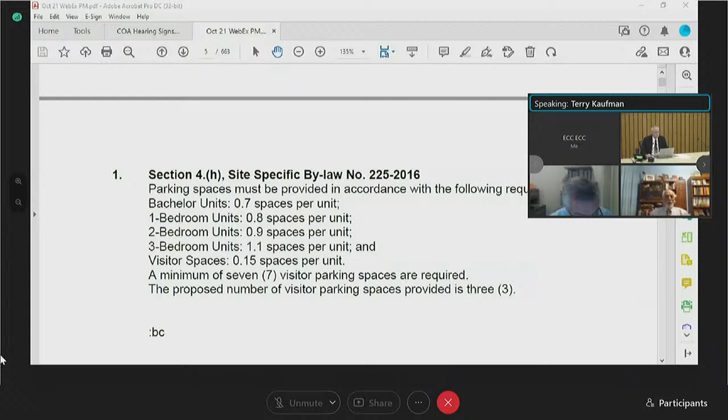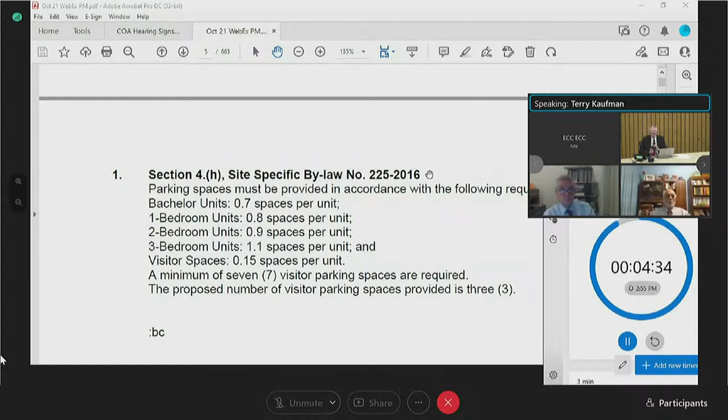This proposal is supported by our parking study, transportation engineer, and the city's transportation department. Both of these documents are in support of our application and are on file with the committee. I am presently with the architect of record, Gordon Pape, and if there's any questions you may have as a result of the site plan and the applications, Mr. Pape is available to speak.

Okay, thank you, sir. Does the committee have any questions of the speaker? There being none, I'll go to the next person on the list.

I have Adele Blau, B-L-A-U. Are you there, madam? Good afternoon, I am here. Can I get your full name and address, please? Sure, my name is Adele Blau.

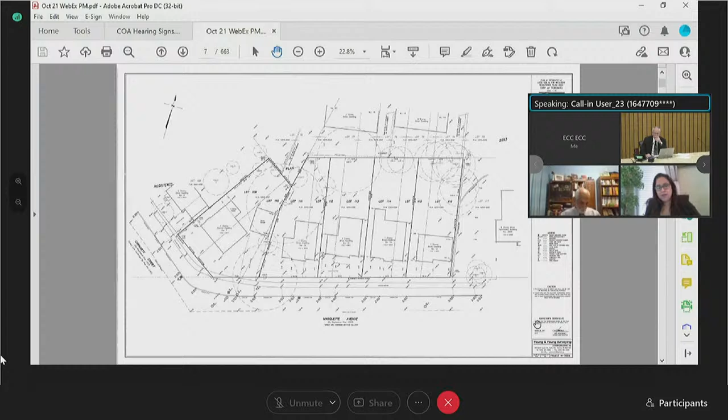I believe that the planning committee, when changing the zoning several years ago, when this was first proposed, did a major change in terms of not minor variances, but the actual plan and the zoning. So I think that they actually need to give respect to their views on it in the first place, and why the parking was allotted in the way it was.

So Marquette is abutting Stadacona Drive, and the parking garage is situated on the back of triplexes, which have a backyard. There are many children on the street, and there are many children in the neighborhood.

There were 11 townhouses put up on Stadacona Drive that have an extra 11 parking spaces provided by the city, and that is actually not enough for this neighborhood.

Both Stadacona, Carhart, and Marquette are cul-de-sacs, and they only have one outlet. The traffic is very, very troublesome as it stands, and I think that bringing vehicular traffic to the street in terms of visitors is not enough.

By the way, the 11 townhouses each have their own parking spot, but that's not enough. Usually the majority own a second car and end up parking on the street. So when visitors come, the overflow is in illegal parking spots. So that's the first piece.

The second piece I wanted to bring to the committee's attention is that there was another minor variance that turned out to be not so minor, with respect to changing the property line, which resulted in property owners digging into the properties on Stadacona. So in terms of this being a minor variance, I want to bring to attention that other things might happen down the line, and removing visitor parking from the site can bring problems.

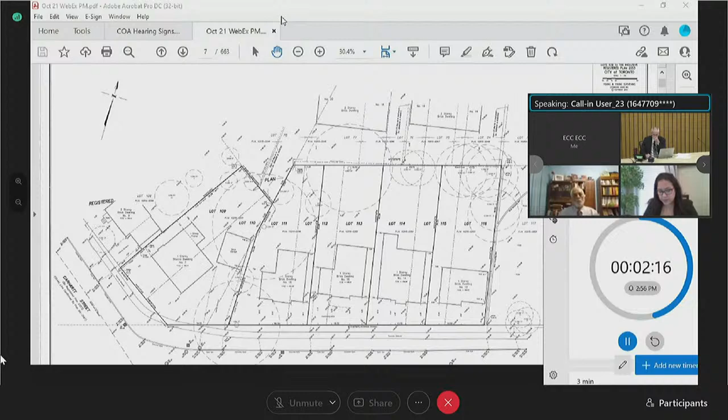Thank you, Madam. Does the committee have any questions of the speaker? Being none, I'll go back to the agent, Mr. Kaufman.

Mr. Kaufman, are you there? Nothing else to say, thank you, Mr. Chairman. I don't think I have anything else to say. We've done our best to cooperate with the neighborhood, and I think we are continuing to do so.

I know that this site is currently under construction, correct? That is correct.

Does the committee have any questions of the speaker? Mr. Khan? Thank you, Mr. Chair. Mr. Kaufman, did you have any meeting with the neighborhood people? I had many meetings with the neighborhood people, not this one, not today, but before we started we had many, many meetings. I presented everything to everybody and kept in touch with the neighborhood all the way through.

Does the committee have any further questions of the speaker? There being none, could I get a motion on this application, please?

Ms. Sankar? Yes, through you, Mr. Chair. Looking at this application, I was worried about the transportation report, some of the parking study, and some general concerns I had heard from the deputants today. But now that they've worked out that plan with the city, I feel that this application does meet the four tests. So I'll put forward a motion to approve this application as is.

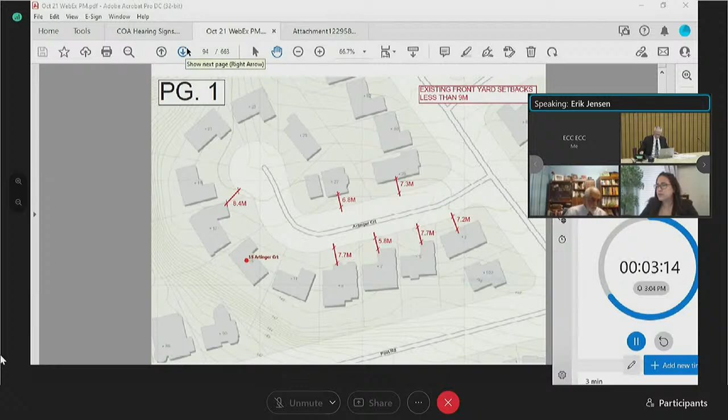Page 2 shows the existing house dotted with the proposed in blue. We worked very closely with the TRCA, who indicated that the back of the house would need to align with the existing, which is what we've done. There's a 6-meter setback for any decks or stairs from the top of bank, which we've also done. You can see the characteristic linear forest that sweeps along the back of the property.

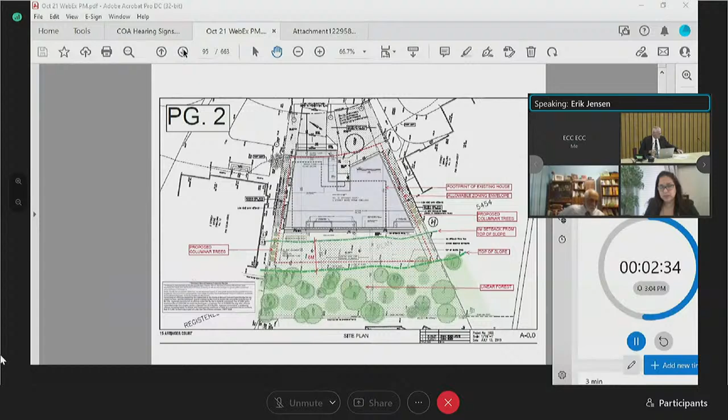Going to page number 3, you'll see the articulation of the front of the house in terms of breaking down the massing, and the keeping of the existing front yard tree, which I think has been important to the neighborhood.

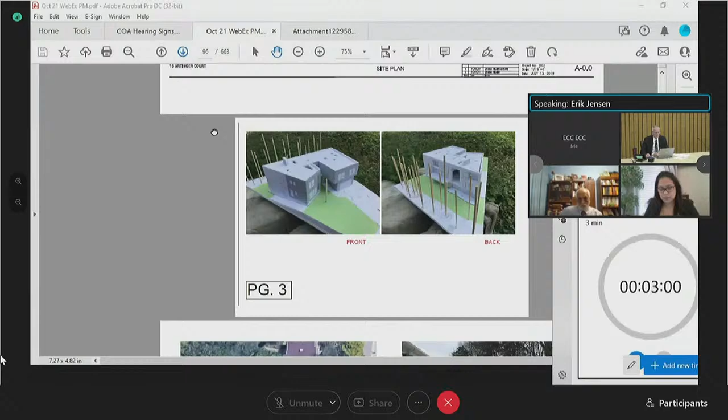Page 4 shows the linear forest at the back of the properties along Arlinger Court, and you can see the ravine both in the winter and summer at the back of the property—quite a dense kind of wall of green, if you like.

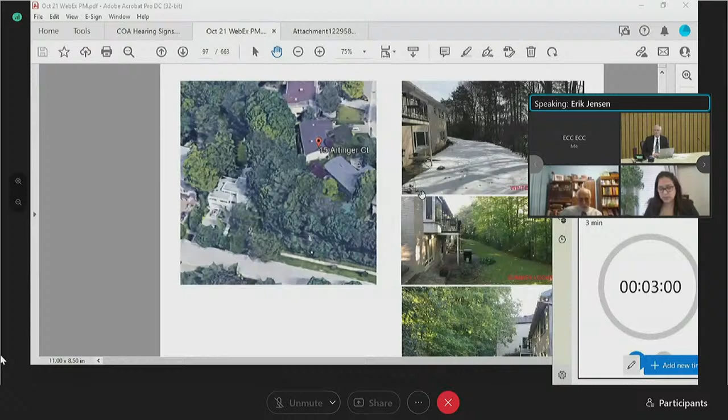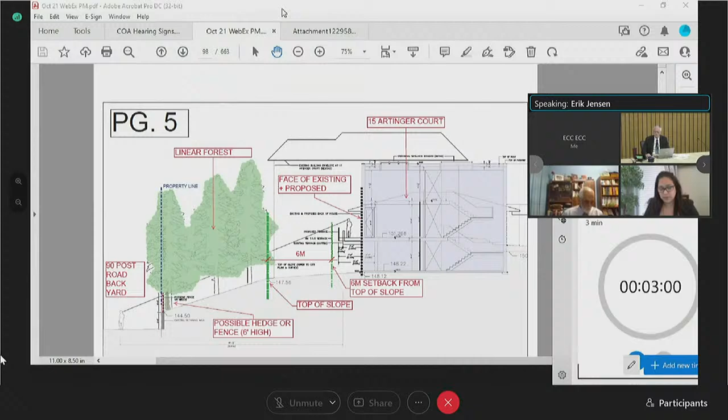As mentioned previously, we are fine with changing variance number 1 as prescribed by planning. Variance number 2 regards the TRCA and their mandate over the stable top of bank. From the very conception of the project, we've reached out to the TRCA and followed their guidelines judiciously as we designed the project. They provided a report indicating they have no objections to the proposed works.

In conclusion, we believe that the proposal meets the 4 tests of approval. Thank you, thank you very much.

Does the committee have any questions of the speaker? There being none, I'll go to the next person on the list.

I have a Mary Beth or John Williamson. Are you there? I am, yes. Can I get your full name and address, please? John Williamson, 11 Artinger Court. We're the immediate neighbors of 15 Artinger Court.

Thank you for giving me the chance to speak, Mr. Chairman and the committee. If you'd like to give us your thoughts on the application, sure—I'll start by highlighting to the committee that the architect and homeowner have engaged us in a positive and proactive basis as they move their project forward.

They've been open and understanding about our concerns. They've offered reasonable solutions and set a framework and foundation of being good neighbors as we move forward. Our backyard is our most cherished asset, so we've extensively reviewed and scrutinized the proposed new house and their build. The homeowner and architect have met with us several times. They've listened to our ideas and have been open and accommodating to what we'd like to see happen. They worked hard to maintain the integrity of the natural elements of the property.

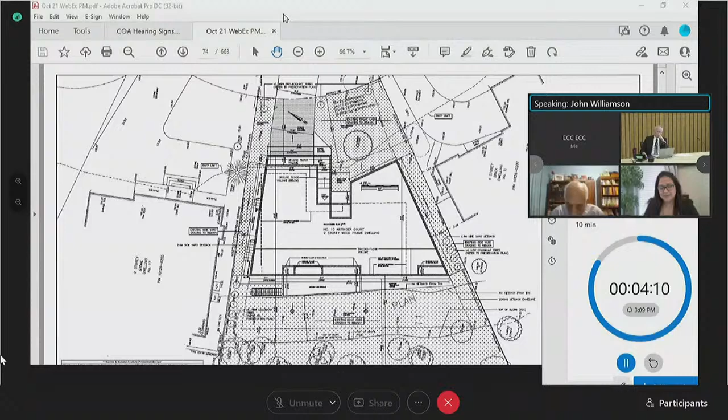I understood that there may be some issues with 90 Post Road. Having been a resident on the street since 1994, I will tell you that when the foliage is in, and even in the winter, those trees and canopy are very robust. There are over 200 trees on our property alone, making it virtually impossible to see down to Post Road or that house or dwelling.

And so I would say that we are very supportive of the variations that have been proposed, and we're supportive of the architect and the homeowner as they move forward. They've done a great job working with us. I'll also point out that our street is filled with construction and teardowns. These are the first homeowner and architect to come and fully engage us and listen to our ideas, and I applaud them for doing so and being so cooperative.

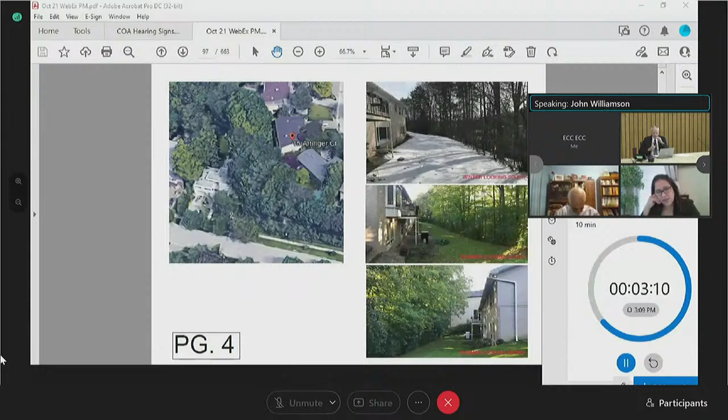Okay, thank you, sir. Does the committee have any questions of the speaker? Being none, I'll go back to Mr. Jensen. You heard the comments from Mr. Williamson. Did you have any additional comments? No, I believe not. No.

Okay, thank you. Can I get a motion on this application, please? Mr. Hunt? Thank you, Mr. Chair. I've listened to the applicant and his agreement to modify the front yard setback from 6.75 meters to 7.5 meters and the second story overhang to 8.2 meters.

And that the condition that the front yard be developed substantially in accordance with the site plan attached to the planning staff report. And also urban forestry, I am happy to recommend approval of this application.

Thank you, Mr. Hunt. Someone to second Mr. Hunt's motion? Ms. Sankar seconds. All those in favor? Opposed? Mr. Khan dissenting. Sir, your application's been approved, subject to urban forestry and city planning conditions.

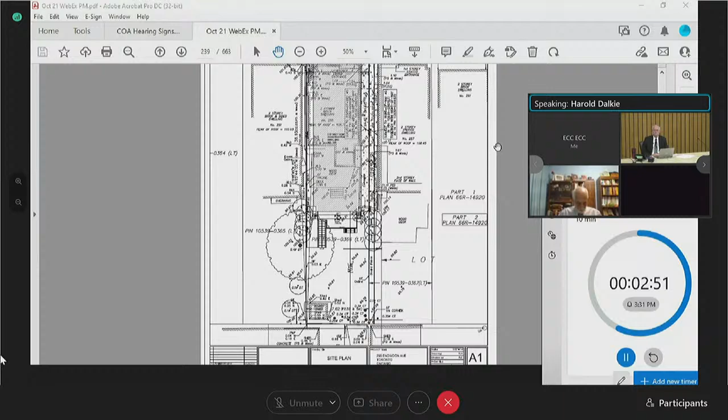That's it, thank you. Okay, thank you, sir. I just wanted to ask, did you get a chance to read the staff report from city planning on this application? Yes, I did, sir. Did you notice their comment about the main sidewall height? Yes, I did, but I couldn't find on the actual drawing, especially in the rear yard, how high the wall is relative to 251's building. Okay, thank you.

Does the committee have any questions of the speaker? There being none, we'll go to the next person on the list. I have a David Stewart. Are you there?

Just something that arose when Jeff was mentioning south of Broadway - that's the city of Toronto. I'm sorry, what was that? Jeff mentioned comparables south of Broadway. South of Broadway is the city of Toronto. I think what she's referring to is City of Toronto versus former City of North York, or East York.

Are you making that with respect to a particular variance? Because variance number 5. No, I'm not. Okay, what are you referring to with respect to North York and City of Toronto? Mr. Seda had mentioned comparables south of Broadway. But south of Broadway is the city of Toronto, so the city of Toronto has different rules. I'll ask him to clarify, because sometimes the former boundary of North York skirts around quite a bit, so it's hard to figure out where it is, or where it was, pardon me, because technically it no longer exists. But I'll ask the owner when he comes back to clarify that.

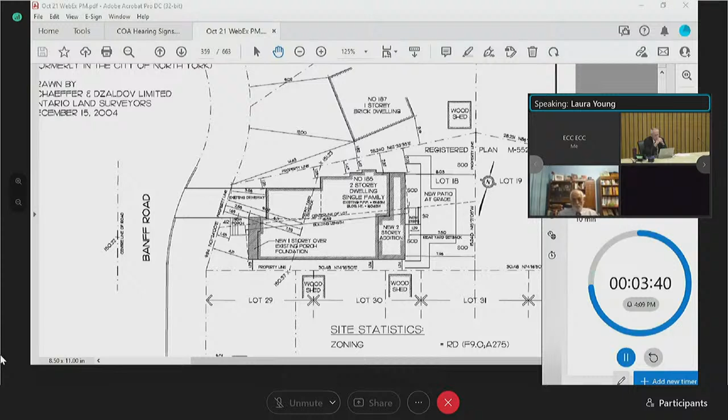Okay, so what I wanted to mention are 2 things. One is if I could make the request of a privacy screening on the deck, or a higher fence. My second item is if there's to be stone cutting, a wet saw or a covering tarp be used, or if there's any destruction of building materials, that a tarp be used. I'm environmentally sensitive and have health issues, so this is a very big concern for me.

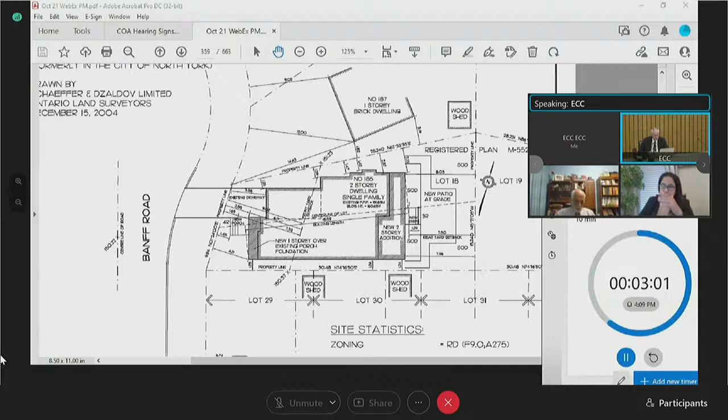I hear you madam, but unfortunately that's not something that's within our mandate. That's something that would be dealt with through the municipal licensing and standards in the building division. Is there anything else you'd like to say? That was all.

Okay, thank you. Does the committee have any questions of the speaker? There being none, I'll go back to the owner. Mr. Zato, are you there? Yes I'm here. Can you hear me okay? You heard the comments from Ms. Young. If you'd like to respond to them, I guess she had a question about your comparables, whether they were former City of Toronto or former City of North York.

Well, first I'd like to address the last point. Laura, I totally understand and am empathetic to some of the disruption of any construction. We'll endeavor to ensure that a lot of your concerns are placated or remediated. We have experienced very similar issues with all the houses around us being built, so we will endeavor to make this as peaceful as we can and make sure it's not as disruptive.

In terms of the privacy screen, we can certainly discuss options around that, including higher fence coverage or whatever needs to be done to ensure minimal disruption. In regards to the coverage comparables, I had mentioned that we connected with someone from the planning committee and looked at comparables both along Broadway Avenue and south of Broadway. So those were the two data points that we had looked at.

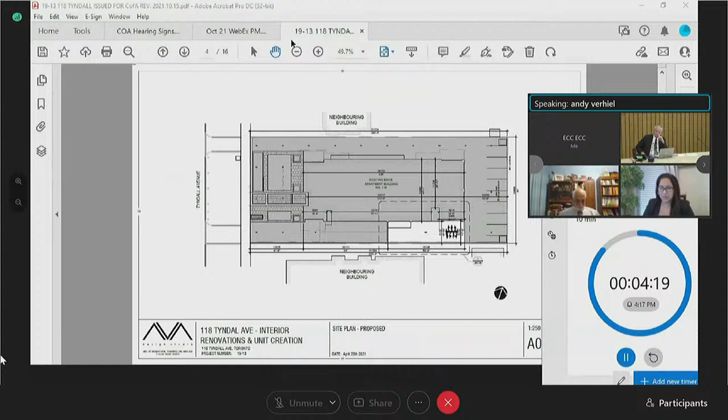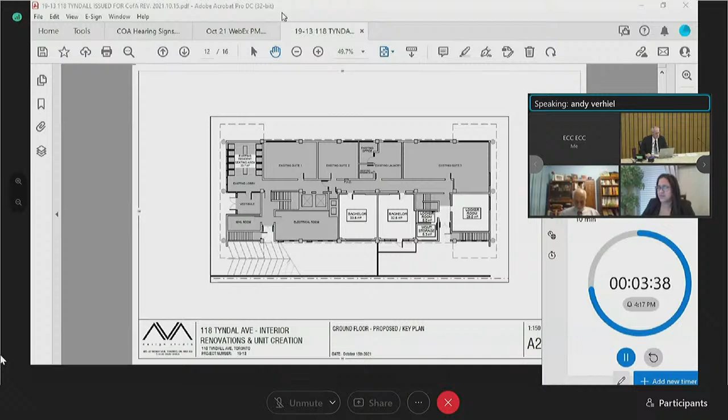That addresses item number 3. We've addressed items 1 and 2 by noting the existing interior amenity space - we are renovating a locker storage area that hasn't been used by any residents for many years. A survey showed we're supposed to have about 36 lockers, so that's what we provided. We turned the unused space into 2 bachelor units, plus management storage. For long-term bike parking, we've addressed it by adding 4 bike parking spaces on the B1 level, shown at A2.00, so we've addressed that minor variance.

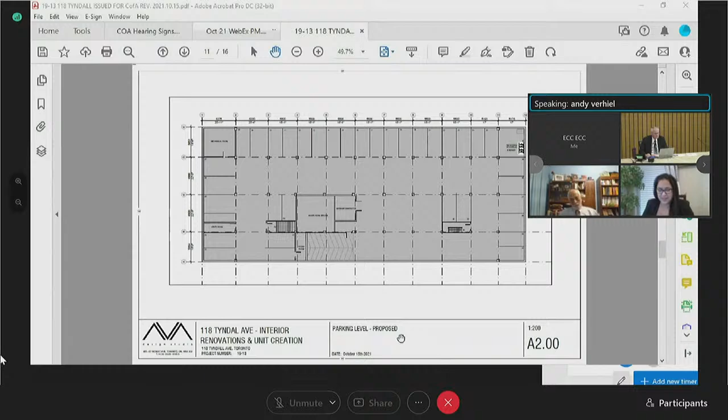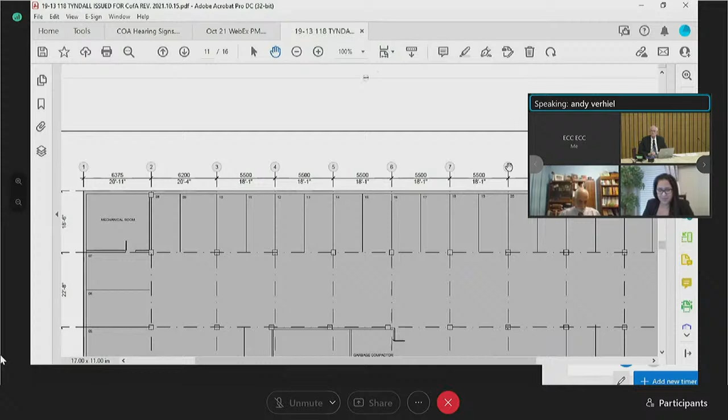Yeah, and that's basically what we have done in comparison to the existing set of drawings that are on file. So here you can see in the top right-hand corner, we've put long-term bike storage. There was a bike rack on the site already, so we have the amount of short-term bike storage. So we're working with the planning department to address their needs and their concerns.

Does the committee have any questions of the speaker?

I do have something, Mr. Chair. I find this really hard today because if this is the same thing they're pulling up on screen that's part of my package, I can understand, but I'm having trouble seeing this. I know he's explaining it, but I cannot visually see this, and I just need clarification. Is that what we already have in our documents? Because that's what I took time to review. And if this is something that's being submitted on the fly that I have to look at on the spot, that's very unfair for the people who've taken the time to look at this in advance. I just need to clarify that, because I can't see very well all of those plans on a screen, and I could just only hear what's being told, so I can't see it to make the decision myself, so I would have to abstain.

Ms. Sankar, that's a fair comment.

Mr. Wills, did these plans just come in? Because I don't think they're in our agenda, are they? That is correct, Mr. Chair. These plans just came in today, at least to my inbox. They had been bouncing around between the assistant planner and the agent for the last couple of days, but it only just got to us as a committee of adjustment today.

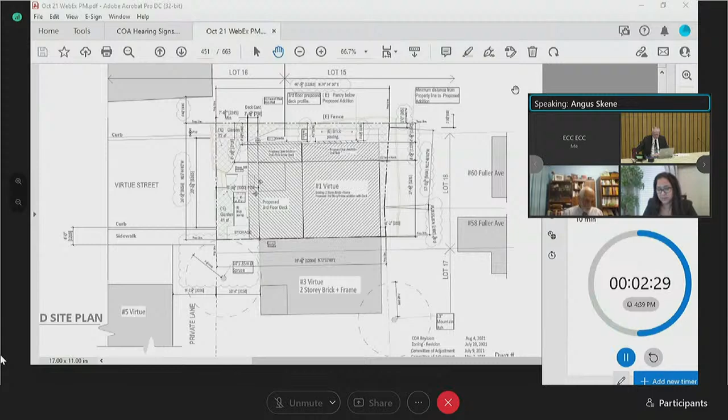I believe it's minor. First off, if committee members could look at the north elevation drawing, number A7, you'll see that the 10.7 measurement is actually to the top of a skylight, not to the roof itself. The roof is actually at about 10.3 meters. So while we're asking for 10.7, I'd like to make sure you understand that 10.3 meters is the roof at its highest, at the front of the house, and the roof slopes down towards the backyard.

The last height variance is the main wall height. As I'm sure the committee knows through experience, main wall height comes in to regulate and break up the massing of third floors on residential properties. It usually forces a sloping back of the wall at the third floor to basically create a roof sloping at a 3 to 5 minimum angle. It does that simply to back off from the streetscape. It requires it at the front and the back.

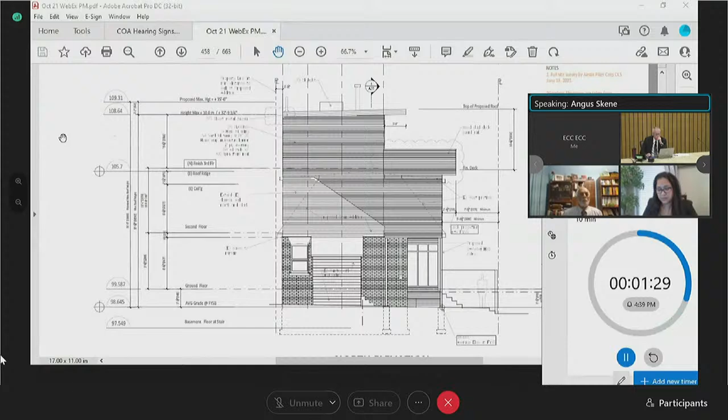In this case, I think we've respected the intent of that rule by not just sloping the main wall at the front, but actually pushing it back a full 3 meters. So if the idea is to pull back from the street at the third floor level, I think we're certainly doing that.

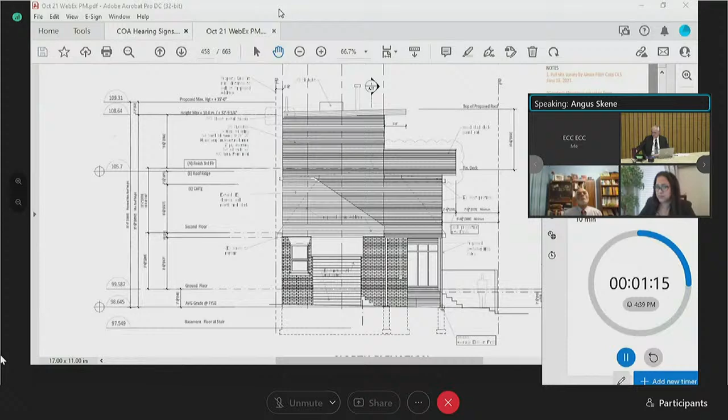The thing I'd wrap all these up in, the FSI and the height, is if you look again at the site plan, you'll see that to the east, north, and west, this building really has no adjacent structures, or none certainly within what anyone could call a close relationship. Granted, to the south, it's attached to the other half of the semi, but I've got to say anyone resident in number 3 Virtue would have a very hard time knowing this third floor addition was built or even existed, unless they could see through their roof, which obviously they can't.

Also, number 1 and number 3 Virtue have no backyard, so it's not even that a person standing in the backyard at number 3 would be aware of this structure.

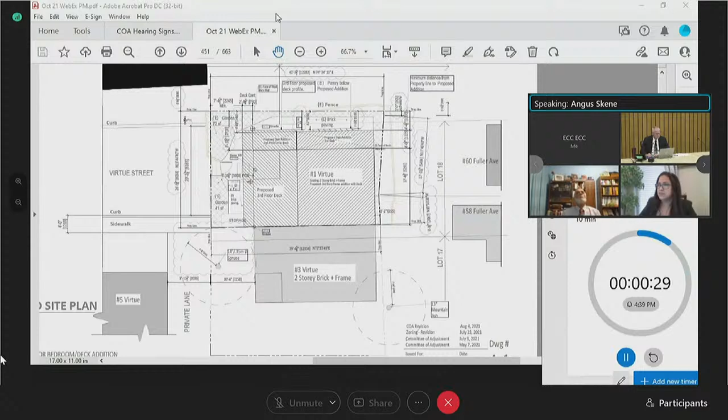So I'll close by just asking you to judge the FSI on the radically small size of the lot, to assess the height variances on the knowledge that a third floor is clearly the intent of the bylaw here, and lastly, that the idea behind the main wall height rule — the setting back, the sloping of the third floor — is certainly met with our setback of this third floor. I'm happy to answer any questions, and thanks very much.

Thank you, sir. Does the committee have any questions of the speaker?

Mr. Khan? Thank you, Mr. Chair. Mr. Skene, you have to realize, I like your presentation, but you have to realize that when you exceed the limits of the zoning bylaws, then you are not complying with the zoning bylaws or the standards. So in that regard, I don't agree with what you are presenting about your variance number 4, number 3, and number 1. These are beyond the limits and allowable under the zoning bylaws.

I don't think a question was addressed to me, but I can certainly answer the idea. I certainly believe the role of the Committee of Adjustment is to look at specifics where the general bylaws are applied to particular proposals on particular lots. I believe there's precedent in the area easily for all of the variances sought, whether it's FSI or height.

I believe what I've said is quite sound, that a 0.7 meter excess in a zone that permits a third floor is pretty reasonable, that the FSI is pretty explicable given this peculiar lot division — a lot division that would have taken place 50 years prior to any zoning bylaw existing in the city. And I certainly would stand by what I say about the main wall height rule, that the zoning bylaw's intent is to slope the front wall at the third floor.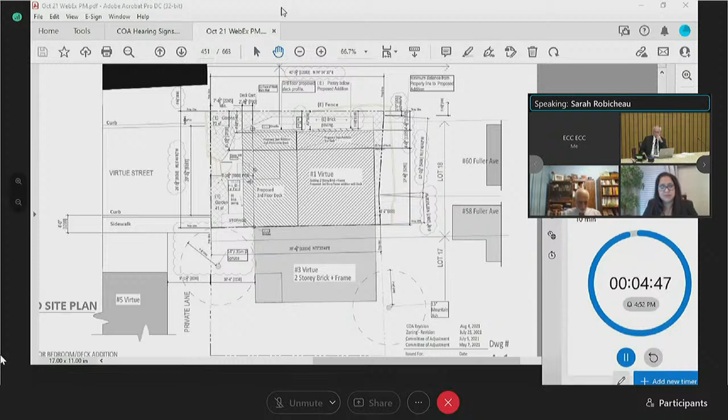I appreciate the efforts made by the applicant to address some of the concerns of the neighbor, but I think the reality with this property is that there are few modifications that can meaningfully address the concerns of several neighbors to the north, as well as the concerns we heard from their immediate neighbor to the south.

The applicant's representative actually said it, I think, my exact point for me. It's about particular proposals on particular lots. In this case, the applicants are basically arguing that because their lot is so small, they should be granted variances that may be more appropriate to larger lot sizes and larger properties. I strongly disagree with that sentiment.

Because of the keystone, or keyhole, configuration of the lots here, with this property being at the end of a dead-end street and therefore surrounded on both the north and east sides entirely by other people's backyards, and not having their own back or side yard to provide any setback or buffer between the building and the neighboring properties, any addition to this property will sit almost immediately at the property line to several properties to the north and east.